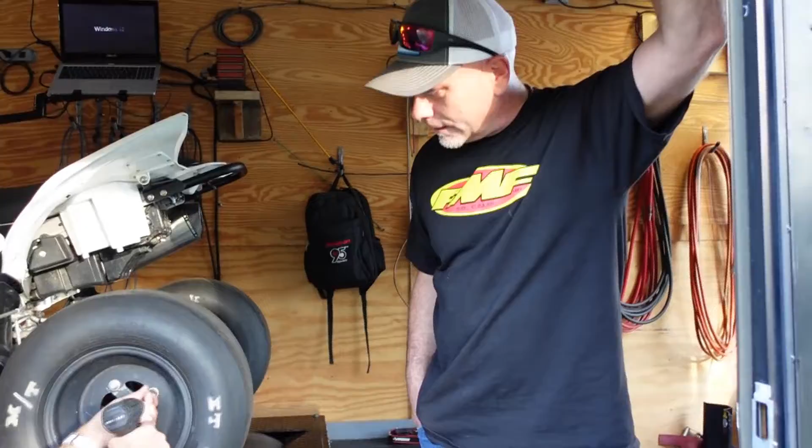So in a few miles we'll be there, and we'll meet Matt. All right, so made it over here to Matt's. This is Matt. Hey, how's it going? Sarmiento. How's it going? And looks like he's bolted up some slicks for the dyno.

That's it, so yeah, I gotta run the slicks, the appropriate tire size to run on these drums, obviously recommended from DynoJet, so we go with what they're telling us. We got the Mickey Thompson, the ET Juniors. They actually work great on here, and that way we'll hook up traction better also on the dyno. So we'll see what we can get out of this thing.

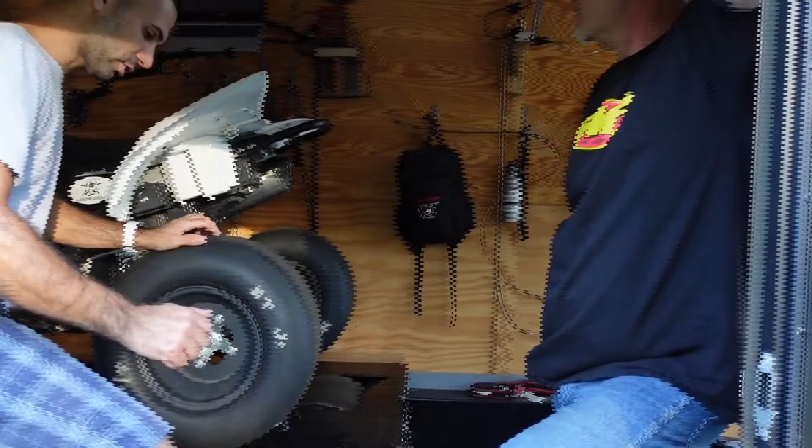All right, let me ask you a quick question. So we just got the VORTEX put in, and that was your recommendation. Yes. So it's got a bunch of dials on it. Now I was talking to a friend of ours by the name of Bushwhacker, so what is the difference between... obviously we got dials, because I don't know, I'm asking these questions for myself. Okay, so we have dials on there.

There are programs, right? I heard you mention that in one of your videos. Matt's got, if you're into quads, into MX quads, Sarmiento Motorsports has a channel on YouTube that you'll want to check out, because I subscribe. So there's programs for the VORTEX, but those programs you have to buy or subscribe to. From factory, the VORTEX already comes with 9 maps already preset on it.

So a big mistake that a lot of people make, and again sometimes you and me go back old school, going back to just straight feel, when you feel the power of an engine or however. So the first 4 maps are actually for stock engines, map 1 through 4, and it actually has a notation there. So one's a power map, one's a traction map, one's a torque map, etc. And then one's a little bit richer power map.

Then after that it breaks off into basic maps for race motors. Now the thing a lot of people make a mistake on, and I should say it's not a mistake, it's just the understanding, is that these other engine maps are for a race motor, something with a ported head, one with higher compression. 'Cause every motor's different. Every motor's different, exactly.

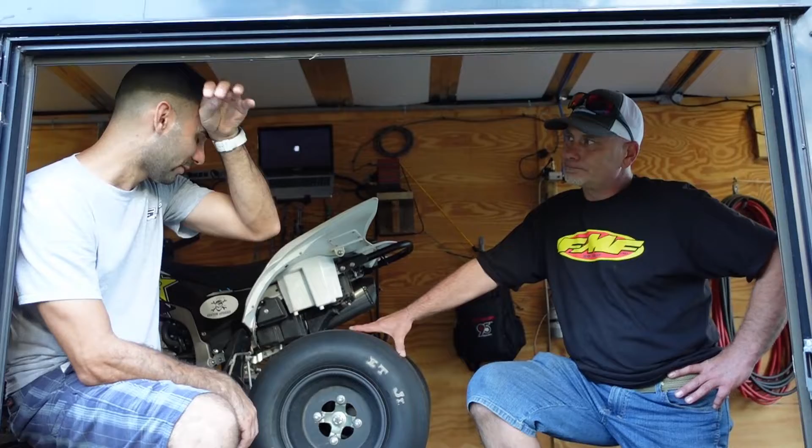I found out I can't build 2 identical motors, even if they're identical, that one performs or does something different than the other. And you've built how many motors in your lifetime? I'm up to 40-something this year, so. Right, in 1 year. I understand, I've been turning wrenches since I was a little kid. So you and me, we understand that there's not a single engine that is the same. You could build them identical, and one's gonna have a little more high-end horsepower, and one's got a little more torque or something.

Right, and they could be identical parts, identical everything, and they're always going to be a little different. Just the nature of how they are.

So the maps are base maps. They're basic, just basic maps to get you started. Now the dials, though, are to change the fuel trim.

So low, medium, high. At all 5s is actually neutral. Once you go 6, 7, 8, 9, 10, you're getting richer, by 2.5% each step. Once you go under that, it actually goes leaner. So you actually go rich and lean. A lot of people think that 5 is already rich, but that's actually neutral. That's a misunderstanding.

But if your motor's stock, and I've seen this time and time again, I've had a motor come in on map 9, which is for like a race motor, a pretty good map. They swear they're getting good power, and I literally make a pass, switch it back to map 1 without changing the dials, and jump up 1 or 2 horsepower. It's because it feels good on the bottom, but you don't have anything on top, you're not developing. So they're assuming that if I use a race map, it's going to turn my motor into a race motor.

That's not necessarily the case. Right, and you've seen that in your experience.

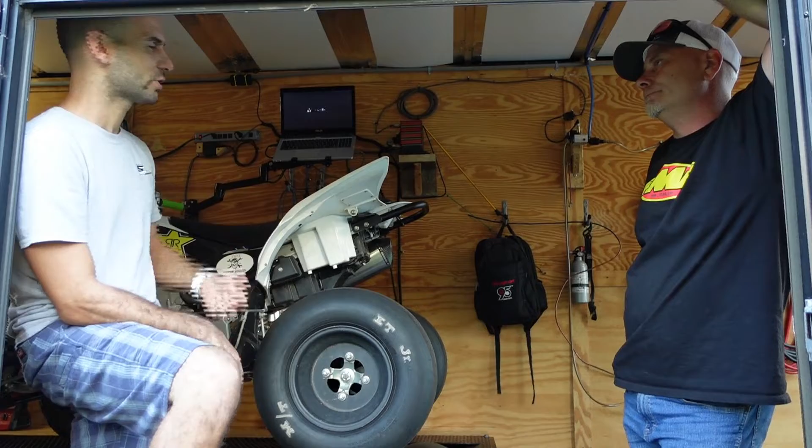Or dumping pump gas, or rather race gas, in on a non-tuned machine, thinking it's going to make it faster. Normally it's the opposite. Race gas is high compression, so if I get a can of 110 or 114 and drop it in on a stock compression motor, let's say 10.5 to 1, it won't know what to do with it. In fact, it might run worse.

It usually runs worse, on the dyno I've seen it run worse. In fact, on my own personal machine we did some fuel testing, and when I went from pump gas straight to a Sunoco 110, I actually dropped 2 horsepower once I tuned it because the fuel density was too much. I was able to get it back with tuning, but I didn't exceed what the stock was, so it wasn't worth the money to buy the race gas because you had to compensate just to get your horsepower back. It did run cleaner though.

So let me assume that what you're going to do here with the dyno, you can basically exceed what the preset maps are and really fine tune it.

Right, so what I'm going to be doing, there's actually 10 spots on there, and I can custom map, custom tune every map. So you can have custom maps on every 1, 2, 3, 4, all the way up to 10. I'll start on 10, that way you save all your stock maps.

I'm also going to calibrate the TPS, basically marry that TPS to your Vortex, so the Vortex is going to read that TPS properly. TPS, throttle position sensor, that's very important, very, very important on this machine. Once they're synced up together, that makes a big difference as far as the response.

I'm going to tune it not just on a wide open pass all the way through, but from idle basically all the way out, so it's going to get a full tune. That way you yield the best results, so I've got to put some time into it.

We'll start with a pretty good, solid, pre-selected map already for the big 3 on pump gas, that I've already created, but they're all a little different. Always a little different, there's always room for improvement.

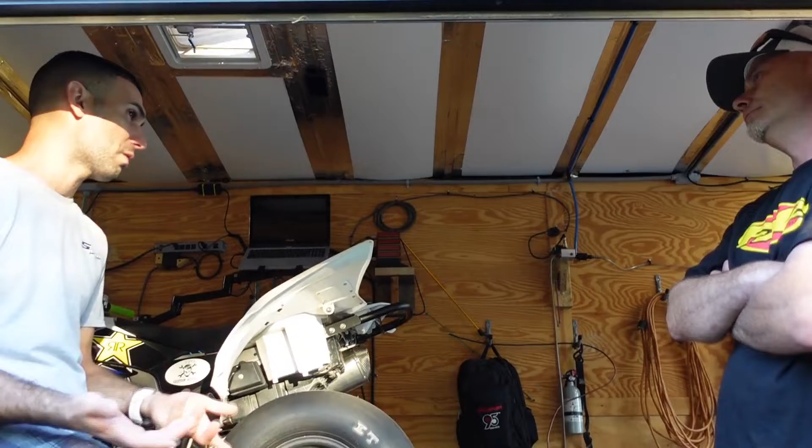Gotcha, that's it. And every criteria, as you know, is different. So it depends on the rider's needs, what they're looking for. Okay, so make it your own. So I'm just looking to not feel like I'm so slow.

Yeah, no, I remember when you got this machine, I was like, wow, this is actually a really clean stocker. So I got lucky, I got a good deal on it. I have one full race at Lazy, and I'm just mentioning this for subscribers and whatnot. So I got one full moto. I actually missed the second moto because I was fixing a buggy, but it happens.

What I found was this, and here's where - because you and I have talked, and I'm like, yeah, I'm not dumping a penny in this thing until I feel like I'm out-riding the bike and the bike's holding me back. Well, the bike I felt at Lazy was holding me back because there was a particular turn.

This is going to sound like nonsense, but where you go where the grandstand is, where the people stand, you go, and then I noticed there's another left-hander that wraps around in a 180, and there's a jump right there. It's a good size jump.

Right, I couldn't get enough momentum coming through that turn - if I attempted to jump it, it was going to hurt. I was going to nose over. So I was rolling over, just a survival instinct. Yeah, so at that point, it's not forgiving enough.

Most people would say, well, you don't need more power if you have more experience. At this point, I think I need more power because I need it to be a little more forgiving, where the power can get me out of trouble. Power can get you in trouble, but I need enough power to get me out of trouble, and that's where I'm at. This is the situation you need to get out of trouble.

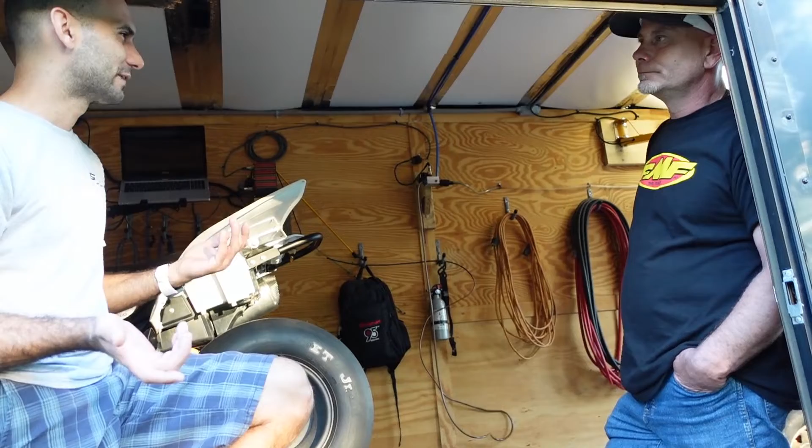So either get the brakes, but then you're trying to compete, you actually need to be on the throttle. You're just on an uphill step up. So thankfully, like I said, there is something there. So the only problem with the stock ECU is either you're on or you're off of it, there's no in between.

And that's where I've seen a lot of people where their confidence has wavered because of that. Like the LTR had a really good stock ECU, especially once you put the cherry bomb on. The cherry bomb was a bypass relay to put on the race map, and that thing ran great, very good, of course, with the emissions problems of it. Now, straight up California, the no fun state, neutered them and said no more Suzukis because it's too easy to modify them. But that's because it was a full blown race machine from factory, right out of the box. So unfortunately, all the manufacturers have had to tiptoe with anything four-wheel, side-by-side, ATV or whatever.

Which we'll leave it up to you. Well, now we're gonna actually put the power back into it, so this is gonna be cool. Now, I have seen with the Vortex too.

Just putting it on, where I haven't had it mapped correctly or tuned correctly yet. Still a little jerky on throttle, but not terrible. After tuning, it makes a big difference how much it smooths out, and when you ask for the power, it's there. When you want it, it's there, and when you need to back off and be smooth and steady, it does what you need. The first time I rode this machine down the road, I thought, man, this thing's badass, like a sport bike with 4 wheels.

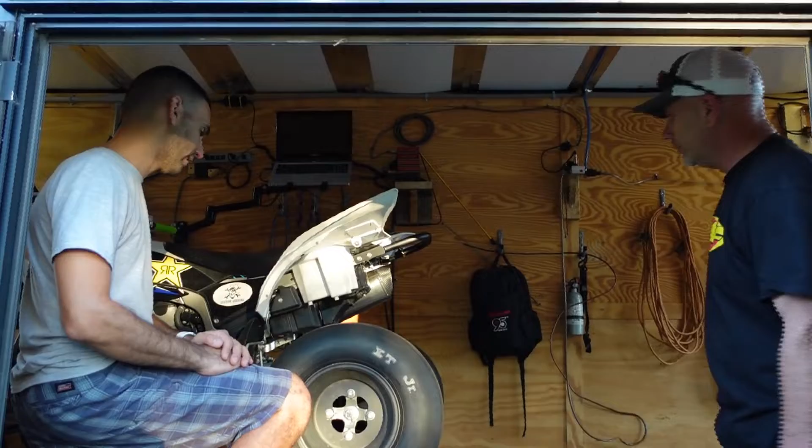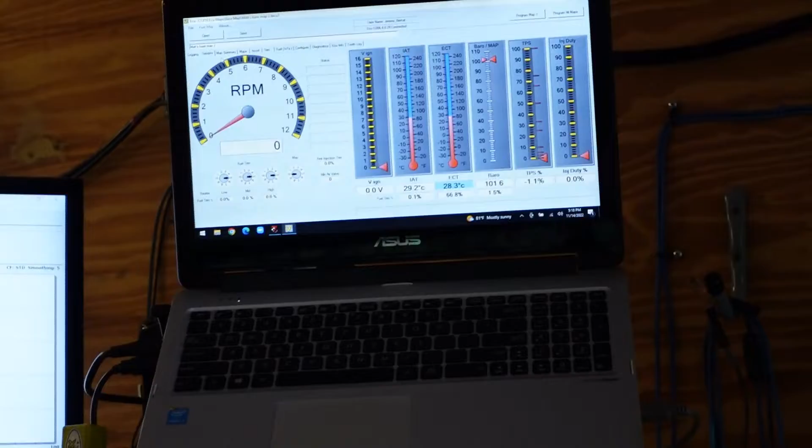Alright, trying to get a good visual on this laptop screen here. Not sure how it's going to come out, but let's not mess up the tripod. Probably had it right the first time. There we go. Okay, so I don't know if we can see the numbers on the laptop.

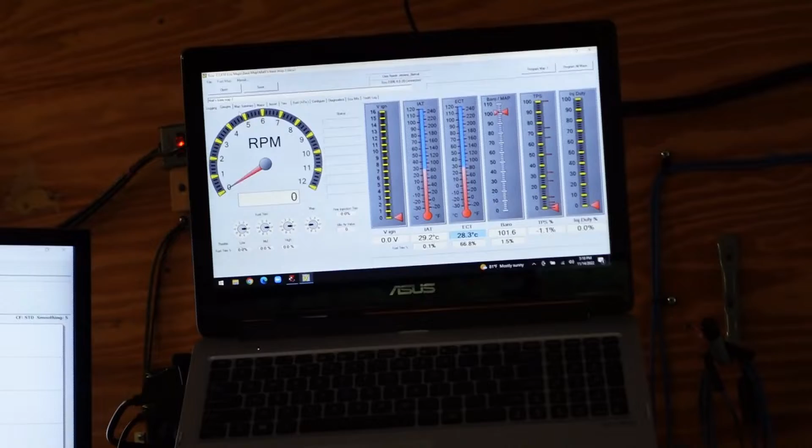Right now it's showing negative 1.1, and well, there's no negative 1.1, right? So our TPS is out of calibration. Now we go to 100%, and we're showing 104.8, so we're out of range right now. It will run fine, but we're not in that crisp range, so we're lacking at several locations.

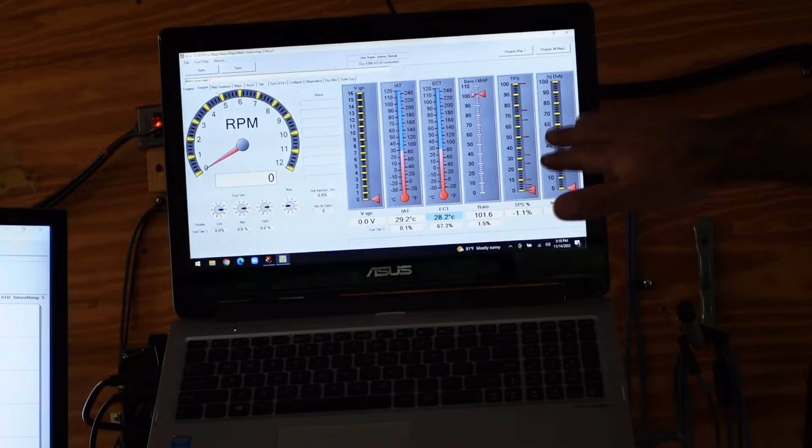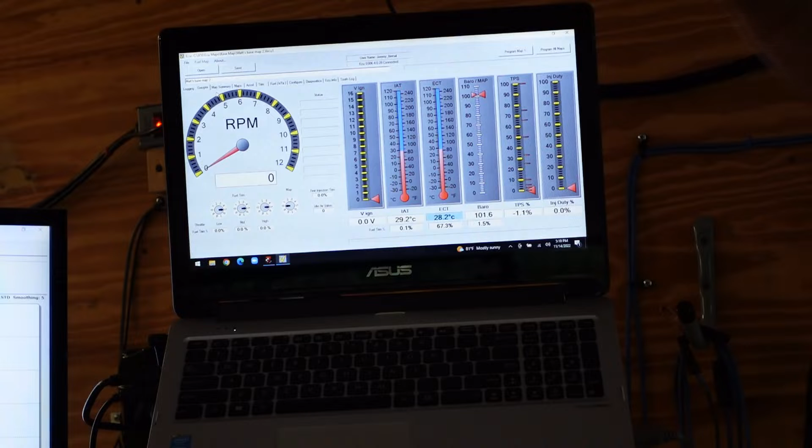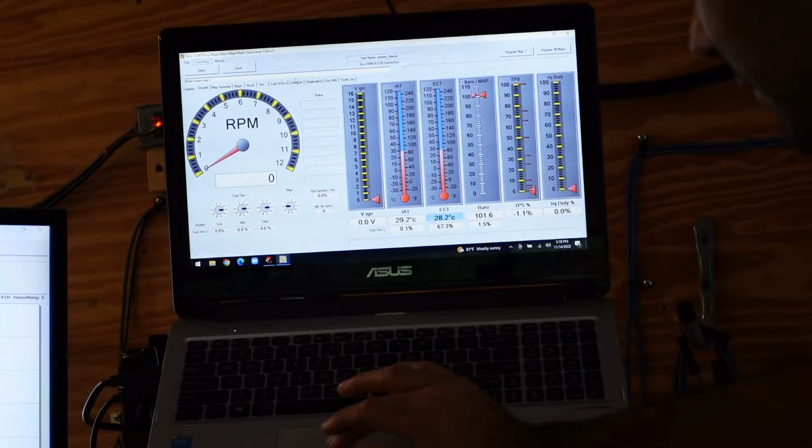So what I'm going to do is calibrate that TPS to this vortex. This TPS is going to be married to this vortex basically until it's changed again. That way it's on point from 0 or 0.1 percent to 100.1, and it's voltage based, 5 volt reference. Easy stuff, and you can do all that from the laptop, something you cannot do by the clickers. Don't even need a tool.

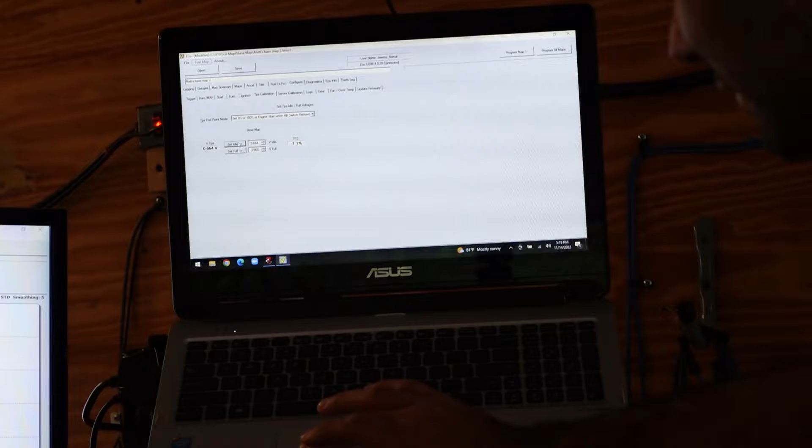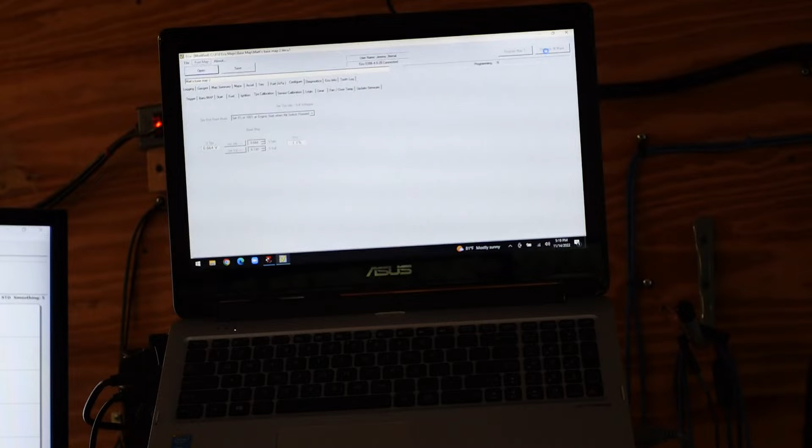So set idle, we just got a new voltage, and now I'm also going to change all your maps to read the new voltage setting, the voltage sweep from closed to wide open, and now it's going to interpret that sweep, like any throttle body on a car or pickup truck that runs with a throttle body. There we go, 0.1% like it's supposed to be, and 100.1%. Now we actually have much better control of where we're going to be, because I'm going to tune it to all the different parameters it needs. That's the biggest start of any tuning, so now we're going to keep going.

Perfect, now we're going to go live on the motor.

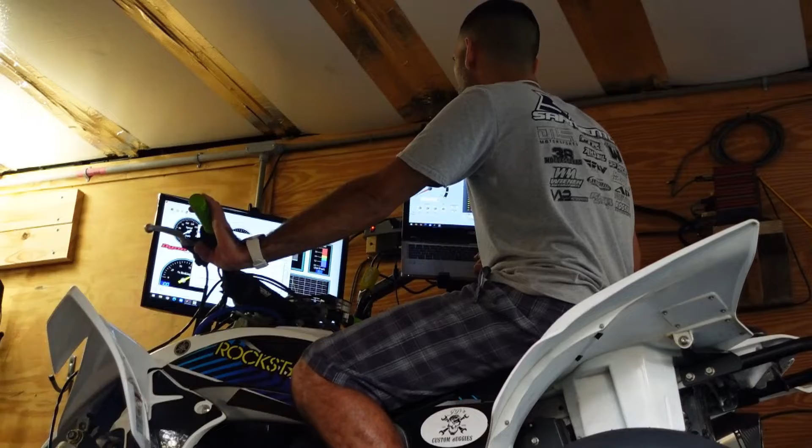We're gonna ditch the torque numbers right now. Yeah, it's coming in way too rich, gets a little lean and kind of dips back rich a little bit, but then straightens out at the end. So we're gonna try and fix that.

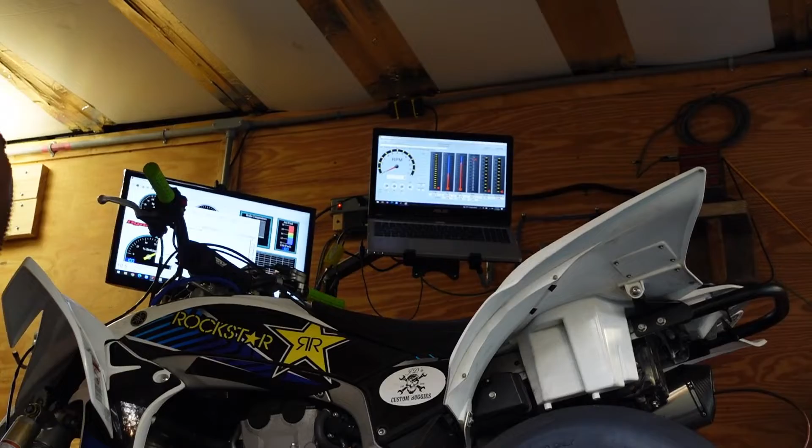We're gonna take the lid off, take another pass, let it cool down. Yeah, that might lean it out a little bit. Absolutely, so that'll take away that big rich dip, or at least help it. That's a huge thing, let's give it a little bit of air there.

So I try to always keep it running the same, that way I can at least watch the temperature and all that good stuff, and keep the same RPM takeoff and everything. The other thing with this tool is, well, also knowing how it's progressing too.

That's the other thing—with the dyno now, we can track the progression of it. What's the most important thing on every motor? It's running healthy and all that, but how fast does it develop? Right now, from 4,000 RPM to rev limiter in 5th gear, it takes this thing 6.5 seconds to get there. If we could get that to 6 or under, that's a big increase. Not that the power's not there, it's how quick it's getting there.

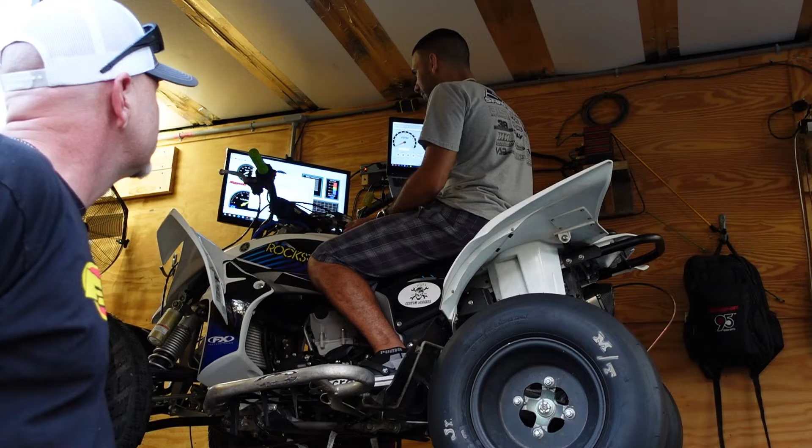So as far as the raw numbers, where does it stack up compared to most bikes you've seen running in the area? We're a little under, about 2 horses under, maybe 2-3 horses under. Mine with the FCI on pump gas, I was able to get 47 horses out of it. Yeah, but that's built, correct? My race bike made 65 horsepower when I took it apart, and 40 foot-pounds of torque.

Big difference. We're gonna drop the airbox, see how that helps, and go from there. And of course, like every other mechanic, I gotta come with a dirty air filter. Oh come on now, take the outerwear off, it'll be clean. I think there's an outerwear on there so I don't have to clean it half as much.

I'll always try and pass it again at 75 degrees Celsius, because in the middle of the...

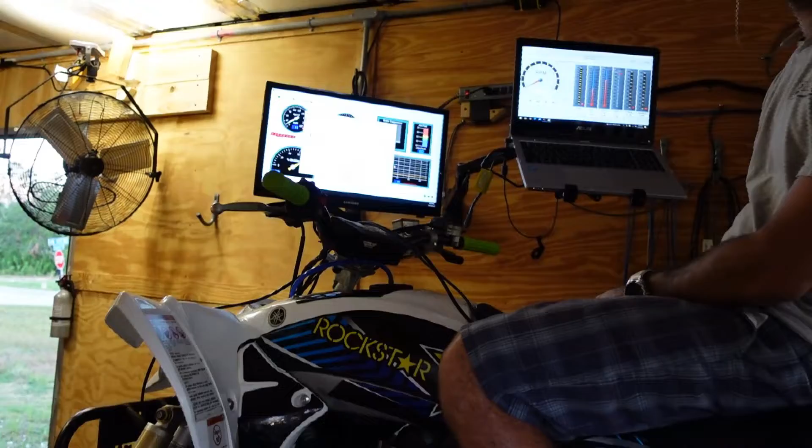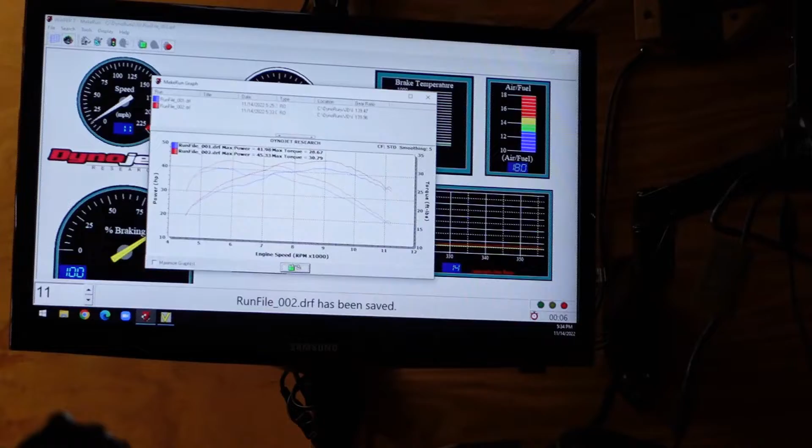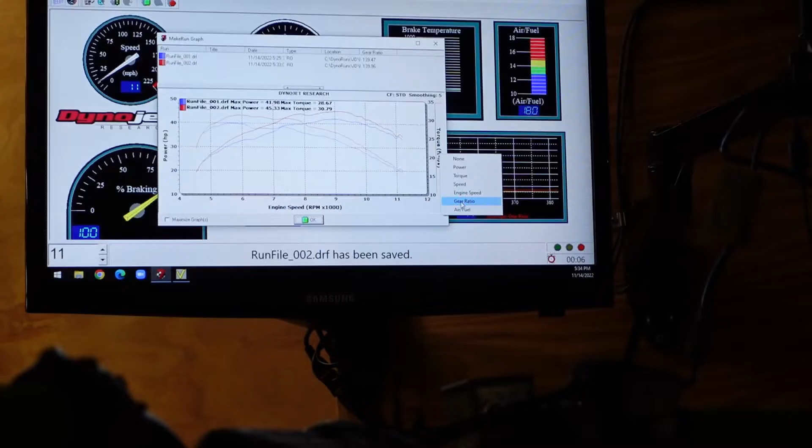Fantastic. I'm floored—all from a little bit of, you know, some beep boops. That's what it comes down to. All right, I got the AFRs, and that was actually a pretty steady pass—all of them still in the green.

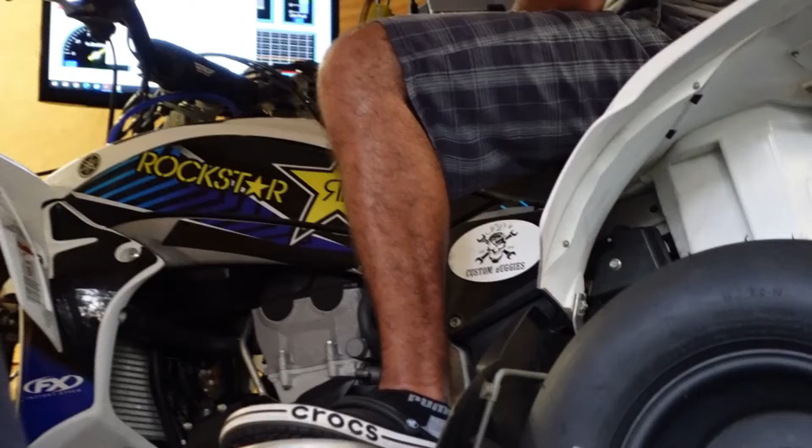And what about that time you were talking about—4.5 seconds? Oh yeah, the time—right. That was all on my race bike, so we could see. Just taking off the airbox lid, we went from 6.5 seconds to now under 6.1 seconds—about a half second, almost a half second.

That's a big difference, how much that will gain, just from the Vortex, that is with a custom tune from me. I already dropped the tune on. We can switch it back to map 1 and put the airbox lid back on, and I guarantee it's going to be less than all that. I guarantee it'll be like 40 to 41 horse.

I can explain it better, I'll go on my end over here. So over stock, we're up 11 horse, and 27 foot-pounds of torque, I think you got on stock or something like that. 26, 27. So anything else we could take off?

Only, is that easy? Yeah, I know. Sometimes it is, sometimes it isn't. So I'm about right there with our frame now. Alright, just gotta do a little work on this guy. And as I've started to learn.

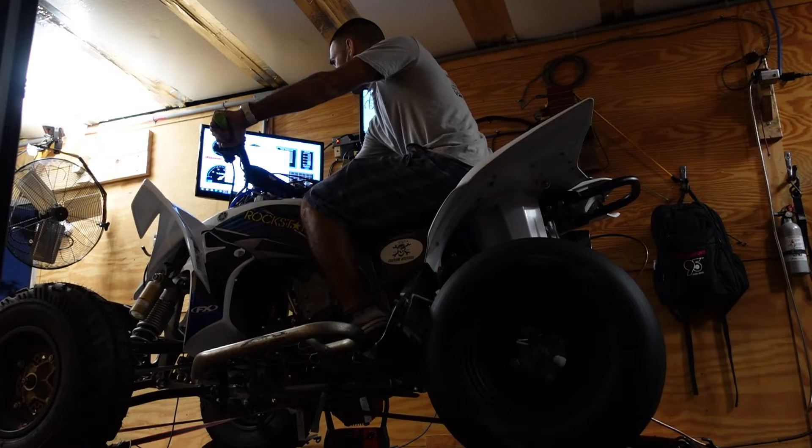I felt that it was surging or laboring. Now, it was very lean. Look how lean it is, we're in the 15 range, in the 15 AFR. That's super lean, that's inching.

Now, by tuning down the throttle position with the screw, are you fine tuning positions, just trying to fine tune between this and that? Well, what it is, I'm actually tuning each map column. That's what I'm doing. Each map column has to be tuned. That's the big deal, tuning all the map columns. Once all the map columns are tuned, everything in between, like when you're at 80% throttle or this or that, now it can equate. When everything is closer together, it can equate easier. All the software is going to equate what is now in between this and that.

Versus load, RPM, and throttle position. But the closer each thing is to each other, the better it's going to be able to respond, like any type of tuning software. And that would be the big money right there.

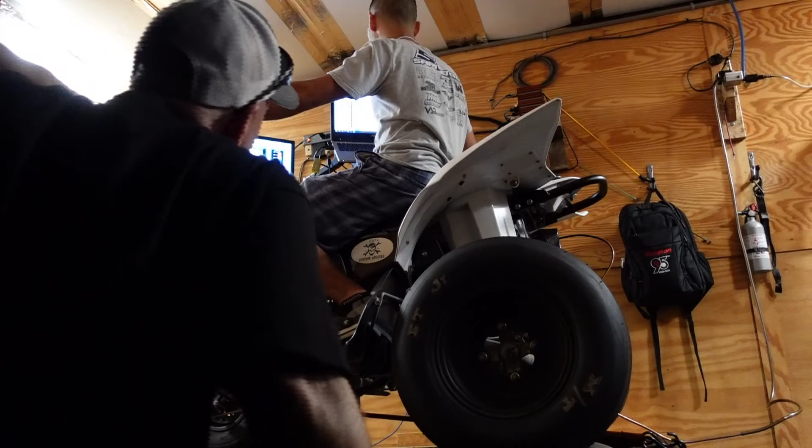Well, I don't know, that extra half horsepower might be a lot to ask for. But what a smooth, that is nice and smooth. That felt good, this is what it did. 45.59, but look how smooth that is. That's what you want to see, just a steady climb all the way up, steady and very, very progressive and smooth. And what was the final number? 45.9? So far, yeah, we're gonna see if we can.

Now we're gonna play with it a little bit. But that's what I'm saying, look how smooth it is. Man, it snapped, I mean when you blipped it I actually jumped. That third gear, look how much the suspension opened up on it. You saw how much? That's how much power it had. But that's on third gear, so on third and fourth, that's what you're gonna feel back on the track.

I thought I was just gonna hop off. I was like, nah, he's not going through the front of the trailer. You gotta break in the straps actually. When you do that, these straps are well broke in. You get new ones, it starts to stretch the straps.

So it's good stuff. Alright, but actually it was a really good run, it was pretty healthy, our AFRs were really good. Still a little rich coming in, but again, I know the intake, so we're not gonna be able to really cure that too much. But it comes on so good, I wouldn't worry about it because look how smooth the graph is. If it feels good and it looks good, and that was all within very well acceptable ranges.

I could at least probably try and mow down that a little bit, get that little high bump off. But at this point, you're working with whatever we got in there, you know what I mean? Like the intake could change and that could. Correct, and an intake would help that a lot.

The stock intake, you can only get so much out of it. Basically it kind of jumps up and then drops back down. So, is it worth it?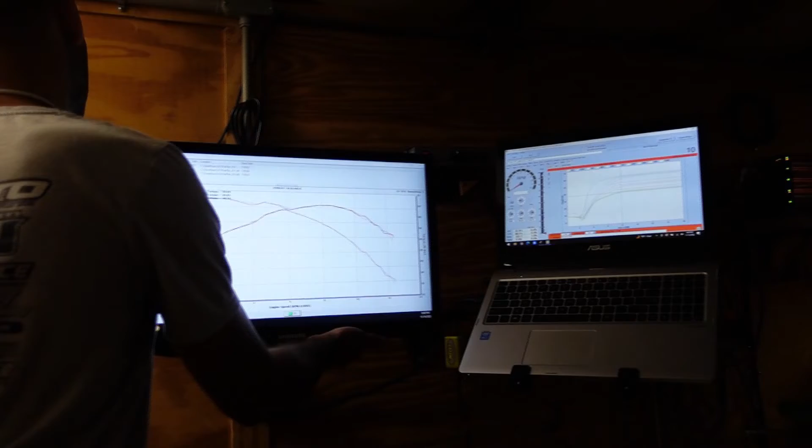This is actually a really good, really smooth, progressive map. So I don't think we're gonna get to 46 and a half, but we might be able to jump to 46. I was gonna say, I think you're going for the 0.1 more than anything, not tripping the straps. As high as that one will go. Is that a good shot on that?

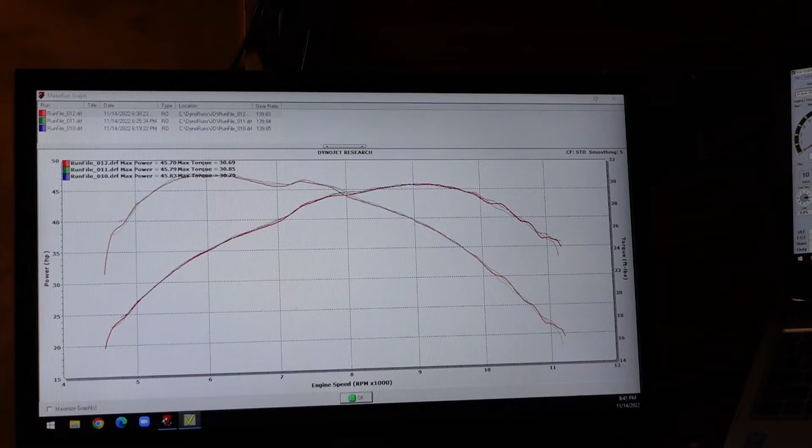Good to go. Alright, so this is the final numbers that we got out of this guy.

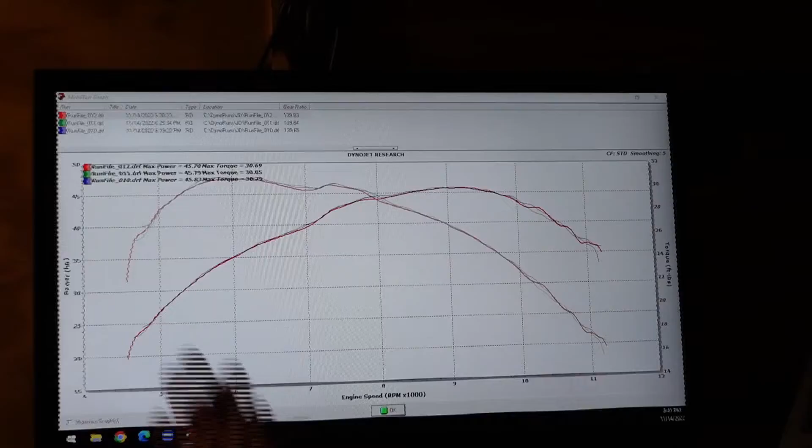I'll try playing a couple different areas here. Right now this is as best it's gonna give us, the healthiest, without changing another factor like an air intake, which would help a lot to get more if we're looking for the 46 and 47 horsepower numbers. But right there, close. Best we saw was 45.83 horsepower and 30.79 torque, but we were able to get a little bit better response and smoothness.

Just did a little adjustment there, a little timing adjustment. So I tried playing the timing both ways, a little bit less, a little bit higher. A lot of people say just add more timing to it, but adding more timing lost power, versus taking away a little bit of timing gained power, because that gave the fuel time to burn. Makes sense, it's pump gas.

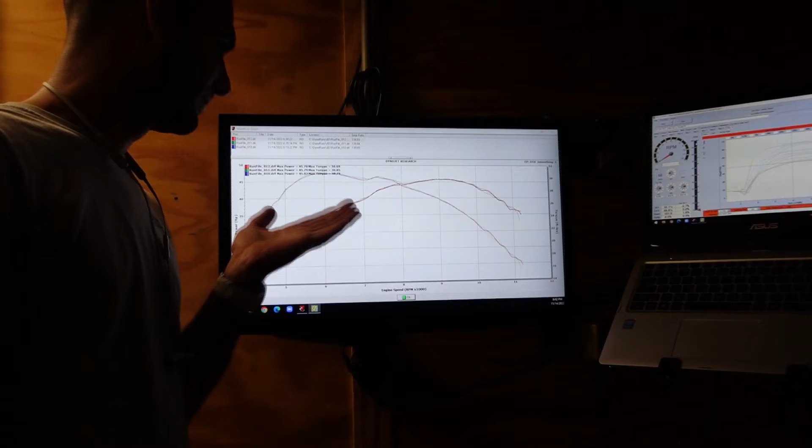So with that said, those are still good numbers for a completely stock motor, 2012. Who knows what this thing went through before I got it. We don't even know what it has in it. We don't know when was the last time it had rings, probably never. I know I changed the oil, but that's all I know. Did you change the spark plug at least?

No, I haven't. How many NGK spark plugs you got back at the shop? Oh, probably a couple, I'm pretty sure. Pretty sure you have catalogs of them. So those are all little things.

We might be able to see - when was the last time the valve lash was adjusted? That was one thing I asked you about at the track, but it didn't sound bad. The machine looks like it has extremely low hours, I don't think it has a lot of time on it. But could a new plug and rings also make a difference?

Of course it can - refreshing it, making sure the valve lash is set well, all those things. Will we see gigantic numbers? I don't think so, I don't think it's going to see something huge. If it was way off, we'd actually see that here on the graph, but that is a good graph - that's really smooth, very progressive, and it's really not terrible.

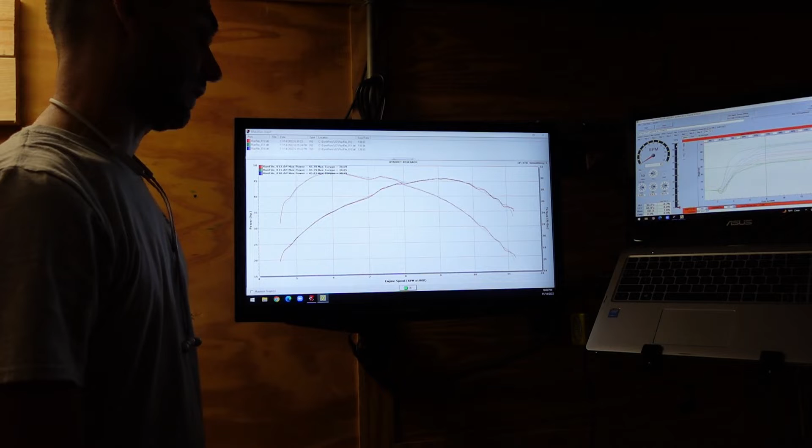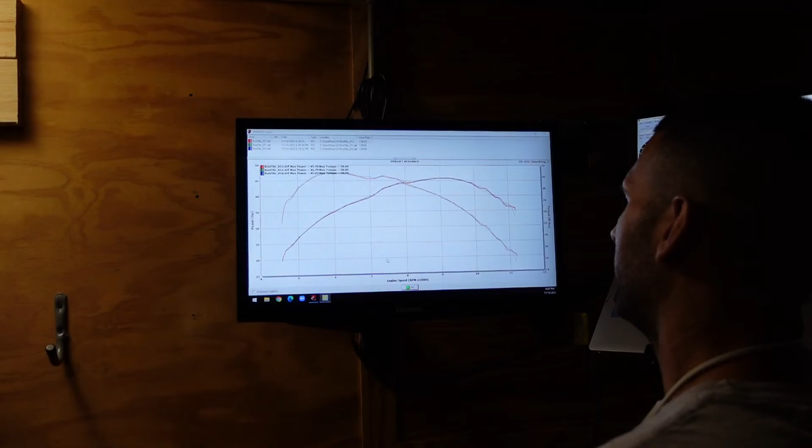And we go back to what it was before, to the very first pass, versus what it is now - that's a big difference. So do you have the first pass on? Absolutely, so we'll switch back to the first pass. Let me get out of the way, and we'll take a look to compare.

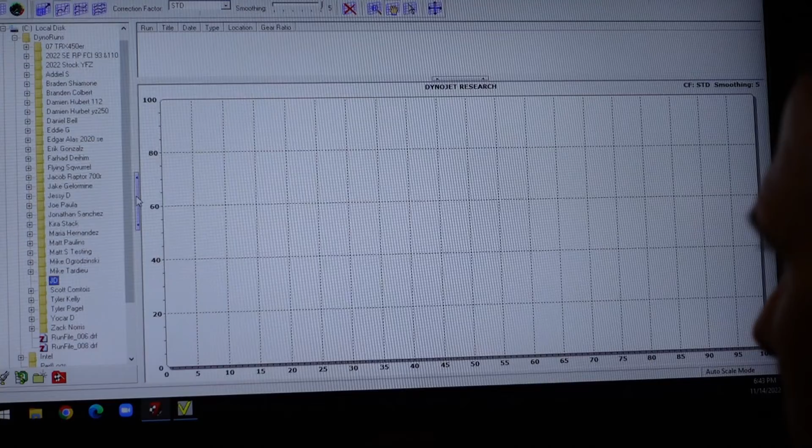And we'll take off. Oops. We'll take off a couple of them, I believe. Actually got to exit on this thing, sometimes it does some funky stuff. To show all your...

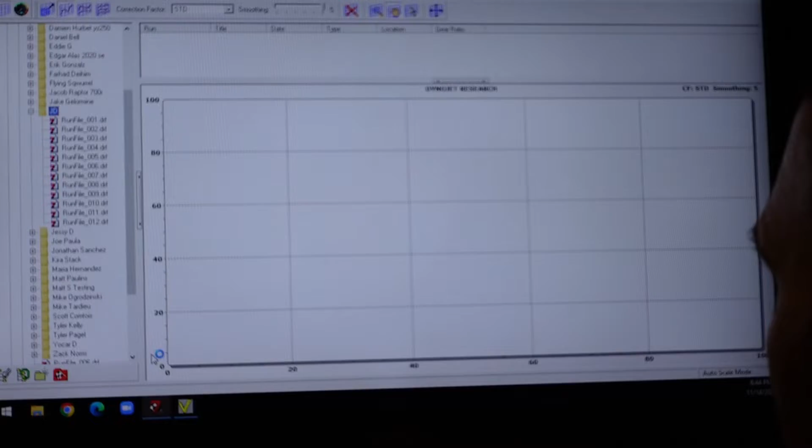Actually, the first pass and the last pass would be cool to see on the same graph, if that's possible. I believe the second to last was - whatever one we got, whatever one showed ended up keeping.

And there we go. So the red is - the blue is the first pass, the very, very, very first pass. The red was when we started getting into one of the very end, and then I played with some of the numbers. But I set you up on pass 11, so we'll take the 10 off.

So that is where she's at right now. Green versus blue. Not terrible, good lord. That is a big difference if you're comparing one to the other, it's huge. That is a big difference, right? That's a substantial difference.

Also, being on a stock head, we can only flow so much. The intake will help to even smooth that out some more as well. See that? It smooths out your graph. All that works together in conjunction.

So that was actually taking away a little bit of timing, taking away 0.2 degrees of timing, and gave us better torque numbers. So we went from 45.83 horses to drop down 0.04, but then gained on torque. So I'd rather have more torque personally, and also the engine got from point A to point B faster. So that's where we're set up at right now.

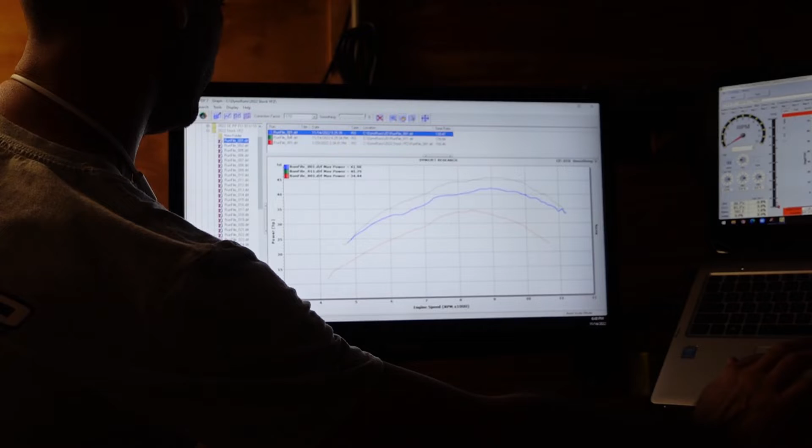We don't need to worry about what the stock machine makes anymore. I can show you off my new machine, the best it made on pump gas with an intake. So that's the nice thing as far as all the R&D work.

Now again, this would be also too with fresh rings. I mean, it's a new motor. Right, so fresh rings, valve lash is good, everything's good.

Let me get rid of this, I just took off the wrong pass one for you. Let me go back to what your best is, where we're set at right now on pump gas. Where did you go?

This is where you're at right now. So that's the difference right now of going with an intake, going to an intake. The Pro Design is the blue line, that's you right now, and the red is what mine is. You're 22 with a pipe and an intake? Pipe, intake, pump gas, and Vortex. Obviously tuned.

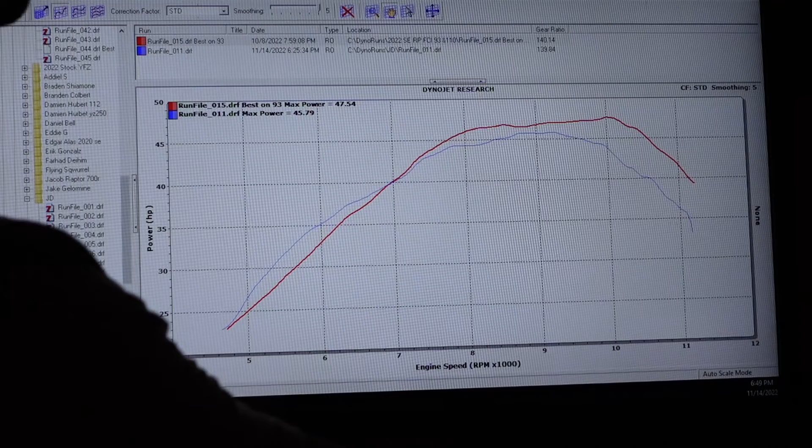So look how much better that carries over. That really keeps the horsepower pushing really good. And now we can add torque back to the graph, so we can all see those numbers as well.

Hey, I mean, you got really good torque. I got a good jump there. That makes sense too as far as an engine - you have a little bit more restriction to it, so it's going to gain on torque quicker, but then it drops off faster. Where mine is holding the torque further out, through the mid-range, longer. So it has more mid-range torque. Where yours is dropping off, mine's still picking up.

So there's a lot of different ways to look at that. This isn't a bad setup, especially for somebody using this for practice, or for woods riding, or even to race it for woods. Because that torque is really good initially, but again, because the intake is a little bit restricted, that torque might be the forgiveness I'm looking for, coming out of corners and stuff. Well, that would be good forgiveness.

I mean, the torque numbers are so close there - yours is 30.85, mine is 30.60, but where it's making most of it is right at the beginning, and that would make sense. On an engine, if you restrict the intake some more, it's going to force the engine to get more torque sooner. That's very common on most engines - it depends on how you do it, but good numbers all the way around.

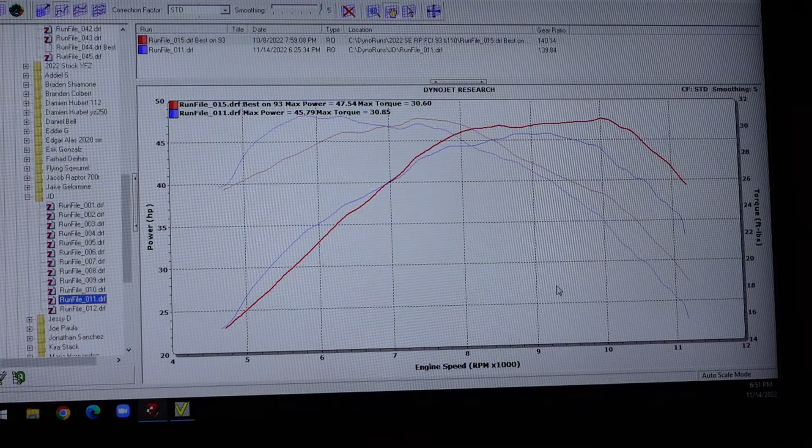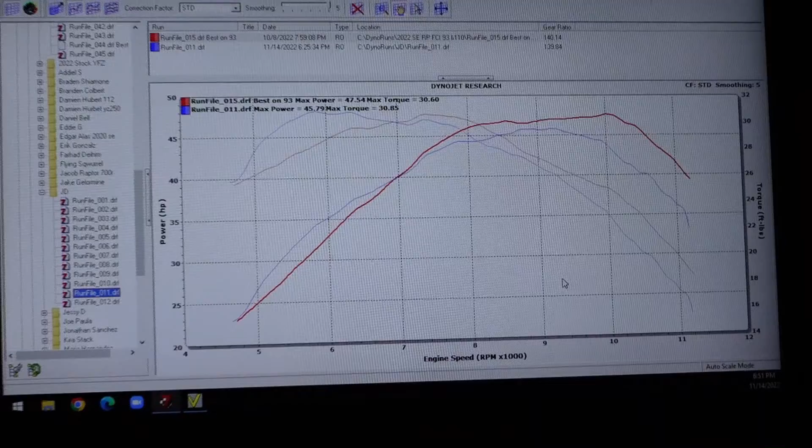So yeah, an intake, we can see in the upper - definitely 46 to low 47s for you easily, not a question. Also, different pipes, different pipe lengths - because you have a shorty and I have a 16, so this would be interesting to see how that equates. Probably ran out of a little bit of time to do a pipe swap, but we'll just do that another time as well. So the intake, I'm going to assume, because everything between the two are so close - I don't know what's in the air box, but with the missing intake, you're talking about maybe the potential of gaining 2 horsepower.

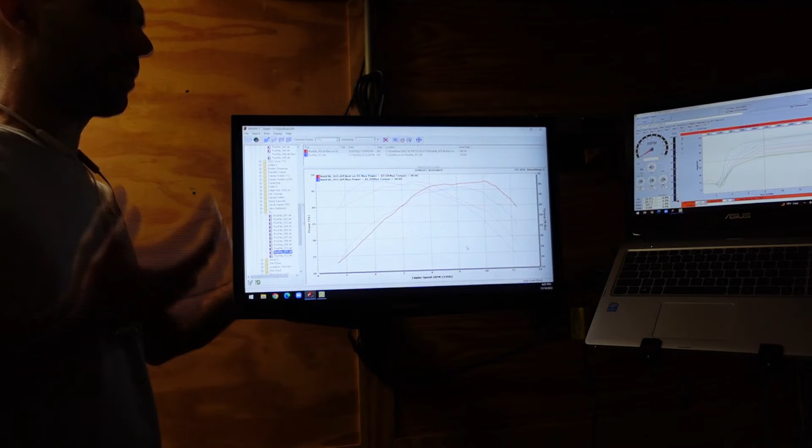That's not even a question. So, the next thing you have to help me shop for. That's pretty much a bolt-on deal anyway, right? That's a bolt-on deal, and so what I was also trying to achieve when I picked up my 22 was, what are the parts that we could get that's an off-the-shelf part, nothing custom. Before you have to pull a brand new motor and do a bunch of work to it, let me get as much as I can out of it without doing all that.

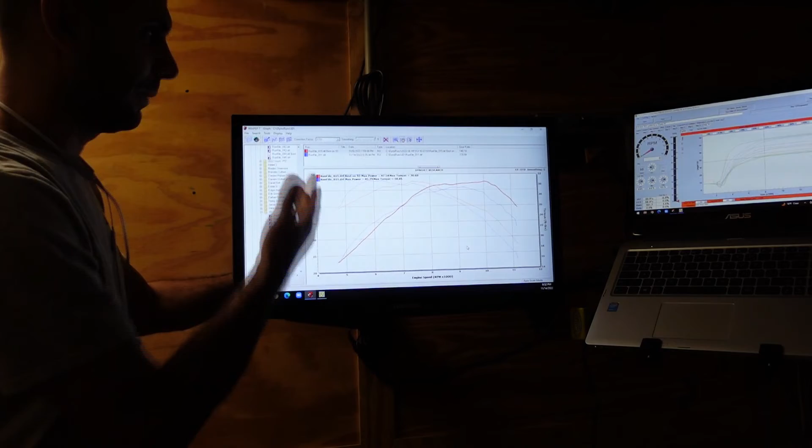And this is also a great example - this is a 2012 to a machine that's 10 years newer. Look how they're really close. They're very close. So that right there tells me also, by your graph, that this motor doesn't have that much time on it. If it was a worn-out motor, we wouldn't even see close to this, or the torque numbers would be dipping down, and we'd see that this thing would be laboring across the graph really bad. So potentially a good machine - yeah, no, it's a great machine for a 2012, a 10-year-old thing.

Hey, 2012 was a good year. I had a 2012 that I had as a race machine, and that thing was good to me when I got it. That thing was mint, and that thing won me a lot of awards. I had that thing for a long time - that thing was a beast. I did some engine work to it, but even stock, it was good. So 2012 was a good year, a really good year. I mean, I personally feel so. Not bad, man, not bad.

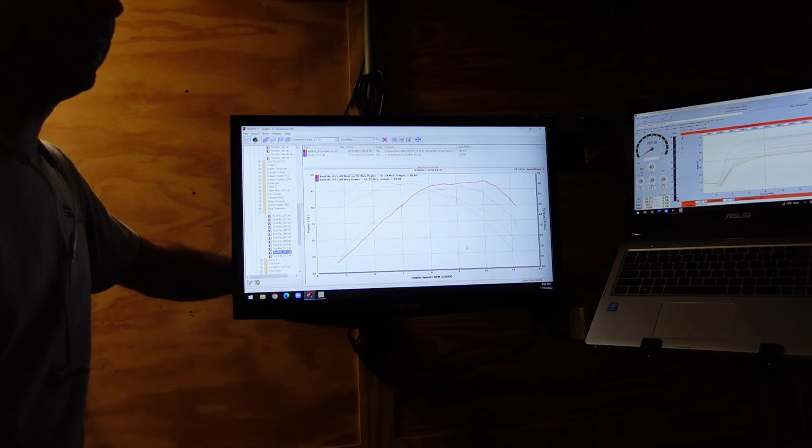Well, I'd say success - that's a huge success. So I guess the next step would be an intake, and it's just up to you what kind of intake you want to try. Yeah, let's go shopping. No problem. Sounds good. All right, man. Cool. Awesome. Fantastic work.